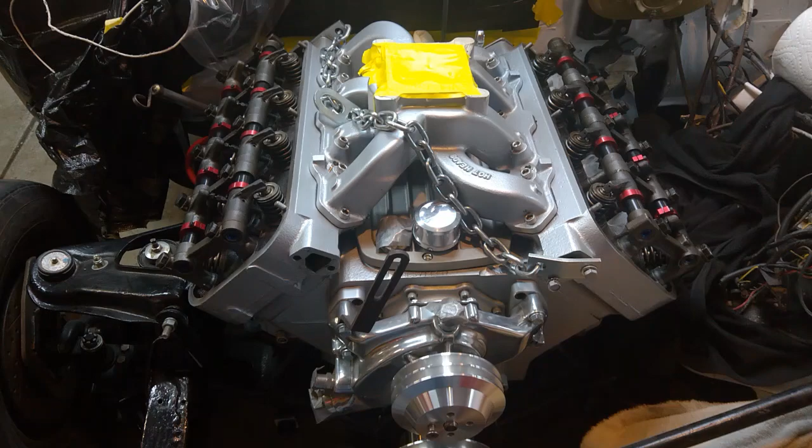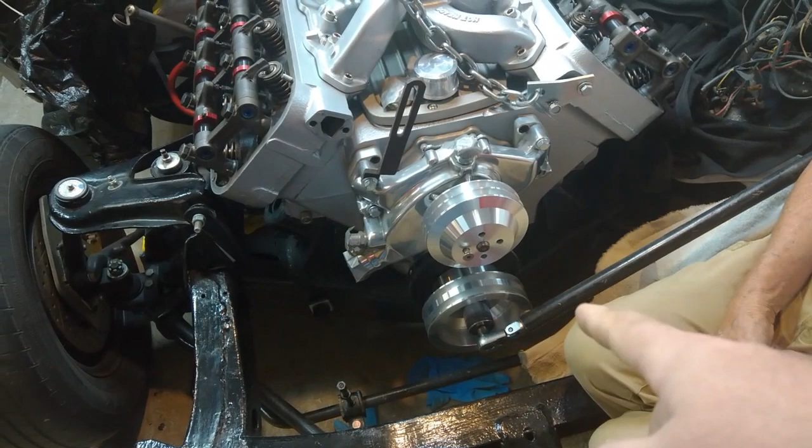Okay, so I'm priming a 392 cubic inch early Hemi. I have absolute top dead center marked on the crank pulley, and I'm attempting to find the rotation on the 2 and 4 cam bearings to be able to push oil through the rocker shafts. So as you can see, this one's just started to come out now.

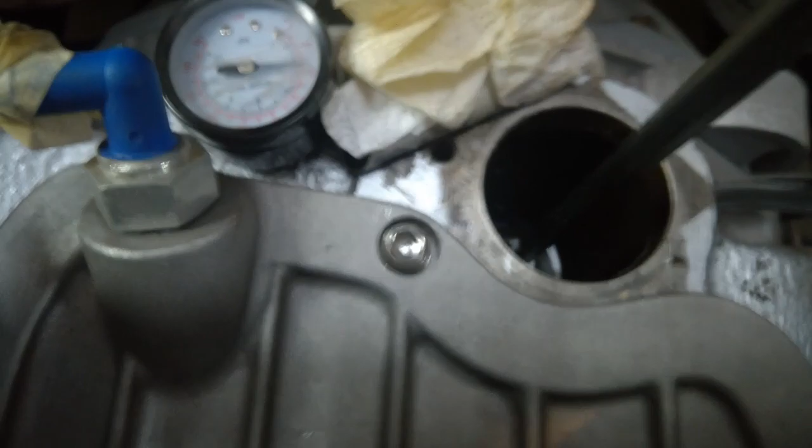This is the drill I'm using, and of course I have it down here on the oil pump to do the priming. So basically you put this in here, turn the shaft, and you'll see the oil come up. The way I found this one was, you'll watch it hit 65, 70, get a nice steady stream. I turn the drill on speed 1, and then turn the crank slowly.

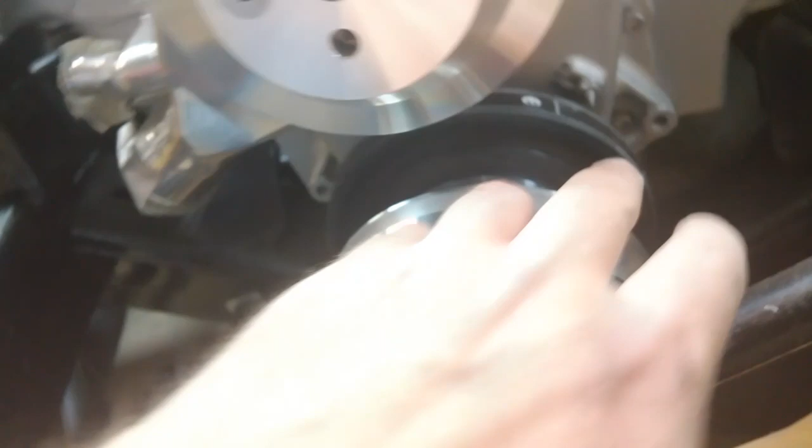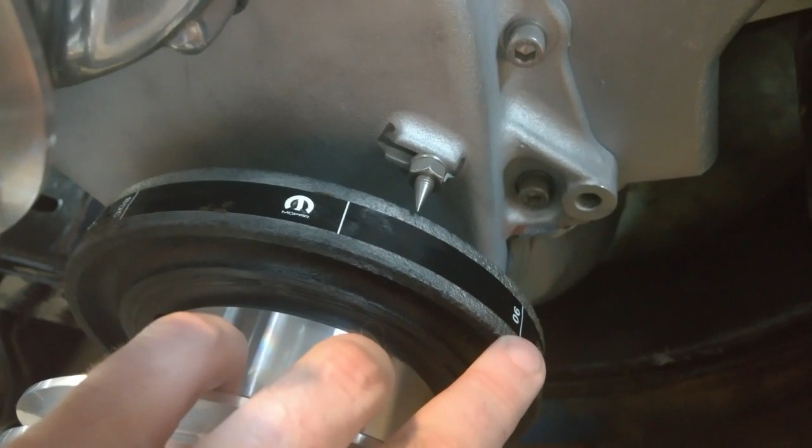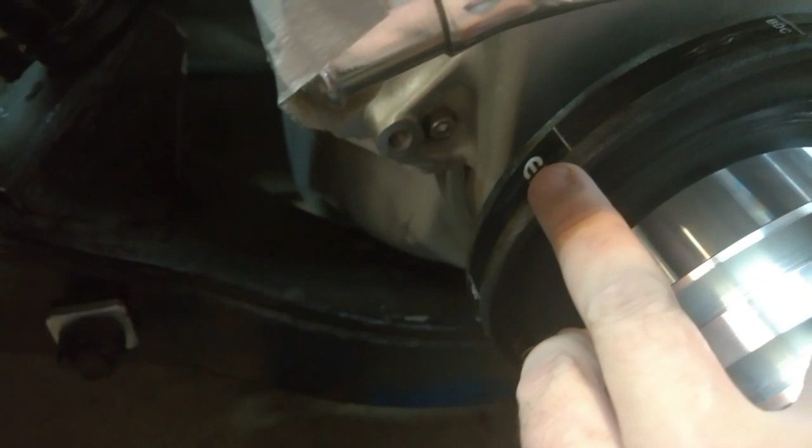I haven't got the passenger side yet, but the point that it hit, this is 90 degrees from top dead center. This would be 120, and bottom dead center is right here. So somewhere between, it looks to be, what would that be, 110? 110 degrees off of top dead center. And I bet the next one is probably going to come over here off of bottom dead center.

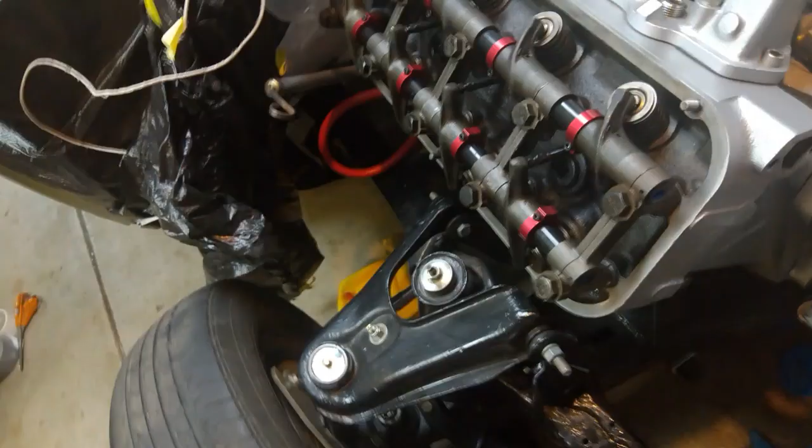So yeah, actually you can tell, if you turn, you'll see the number 8 cylinder is up pretty close, and then the number 5 cylinder is up. I believe the number 5 cylinder is the highest. I don't know if it's top dead center, but you'll see that the number 5 cylinder is up pretty high. You can't see it there, but it is. Anyways, that's the basic idea. I'll see how the next round goes.

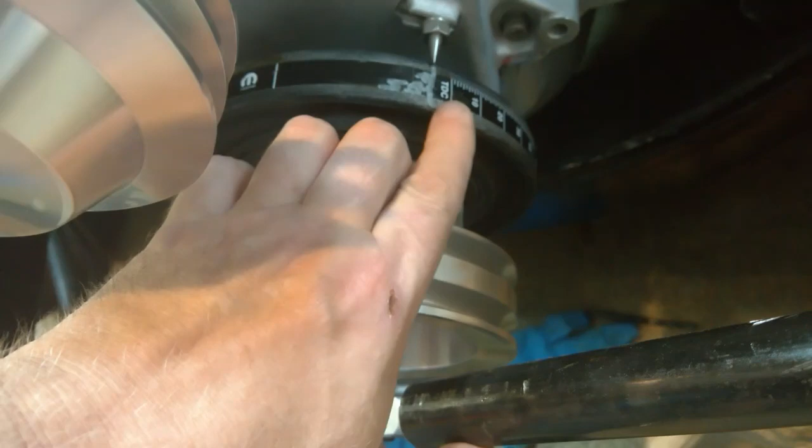Okay, so the second point, which is the passenger side head, the timing mark will be about 5 degrees past top dead center. It looks like this is exact top dead center. Sorry, it's fuzzy. I think the factory setting is like 7 degrees off, but this is exact top dead center. Now maybe my mark is off. Maybe this is actually perfect top dead center, but anyways, you can see the oil coming through now.

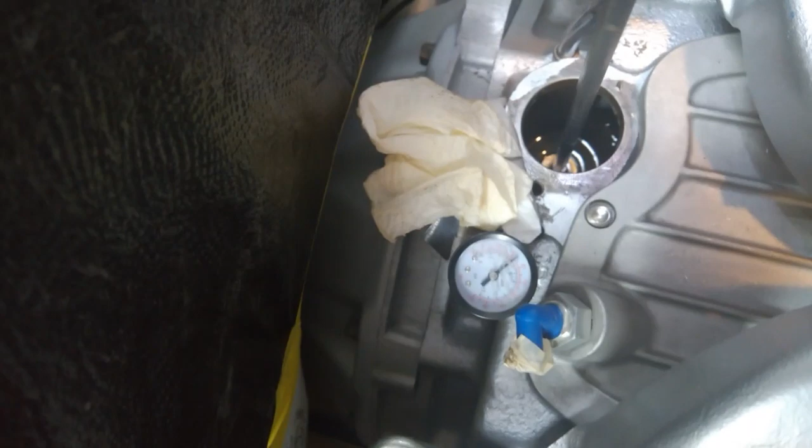I actually marked my crank now, so when I'm about ready to start it, I don't have to take the valve covers off, and I can just fire it up and go. What you do is you put the crank in, you put the drill in here, and you'll turn it up, and you'll see the pressure come up. Like I said, I watch it, and then if you turn it, when you hit them, you'll see them pop. You'll feel the pressure go. That's how you prime a Hemi.

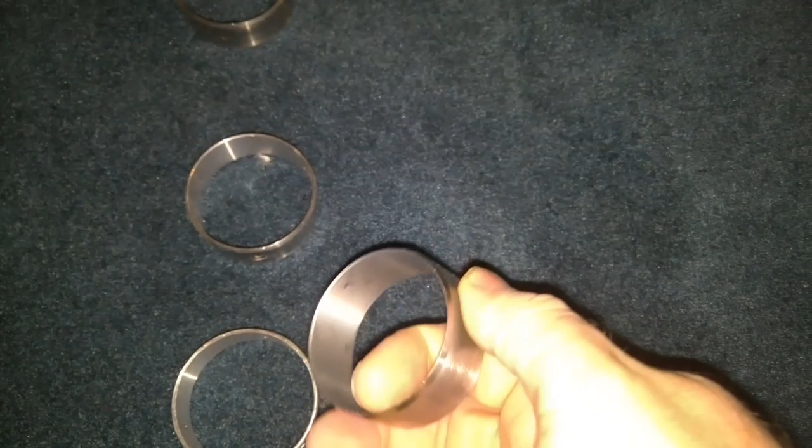Okay, one thing I wanted you to notice is the actual cam bearings. This is an actual front cam bearing. Obviously there's no oiling holes here. But the next 3 cam bearings are the ones that have the oiling holes. That's the main center one that's going to be at the bottom, and then these 2 here are the oil holes that go to the heads. Now these 3 all have them.

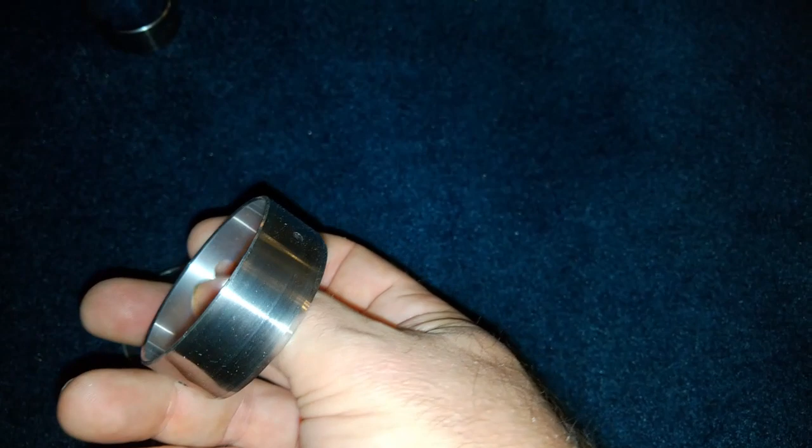I think they just do them out of safety. I think you're supposed to chamfer these; they said something in the manual, you need to chamfer these a little bit. So you'll see all 3 of these, and this is the back one. Obviously there's that large main oiling hole. So these 3, they always want to be safe, and they always include those 2.

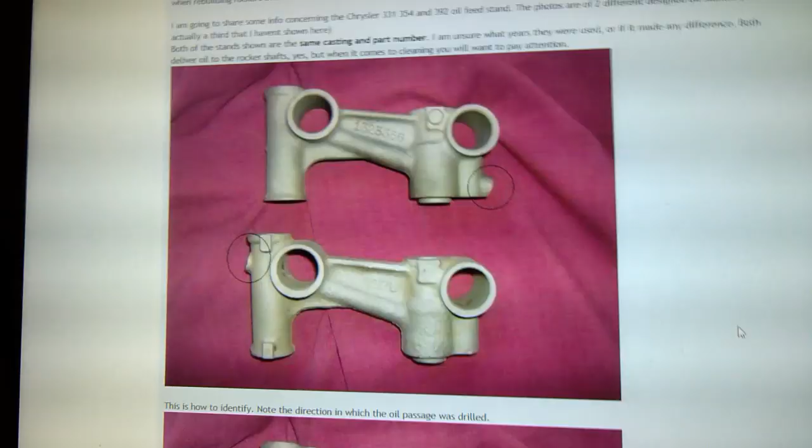You'll see it's a perfect Y, so the oil's gonna come out this way, and as the cam comes around, it'll go out that way, and then it'll go out that way. And I think you'll see that with the timing of where these timing marks are. So that's another hint, some more information about priming issues, or how oil gets around.

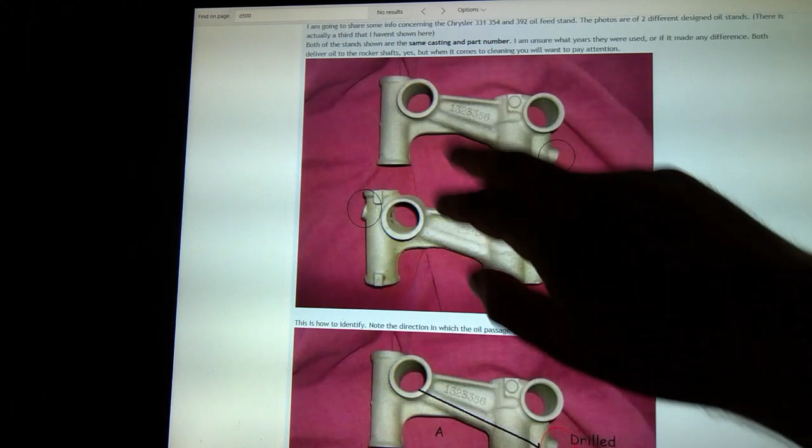This is an example of the two different types of stands you get for the oil. Oil comes up here, goes over to the different rocker shafts. Anyways, there's two different types: the drilled from the bottom and drilled from the top. Drilled from the top are the real easy ones to make sure they're unclogged. Basically, you're looking out for these round rings that get inserted here to locate the rocker stands.

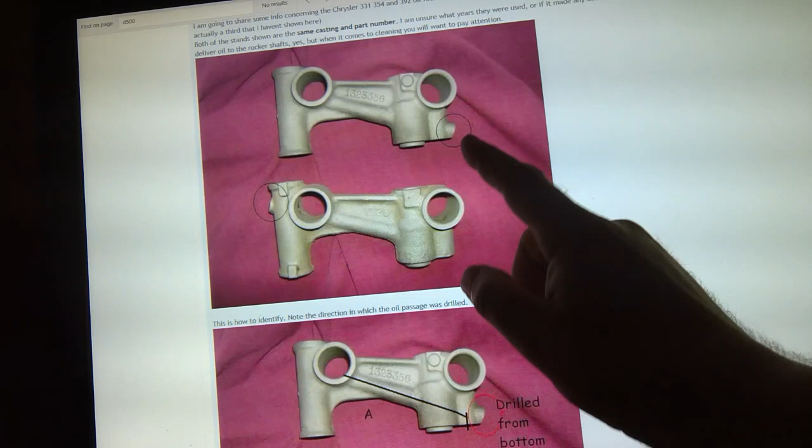So what happens is, when they drill from the bottom, they have to kind of converge. They come up with the hole and then it converges. But sometimes it's a little too close to this ring that they've shoved up here, and it makes a small opening, and the oil won't get through very easily, and they get clogged. So you've got to make sure you do some work around here.

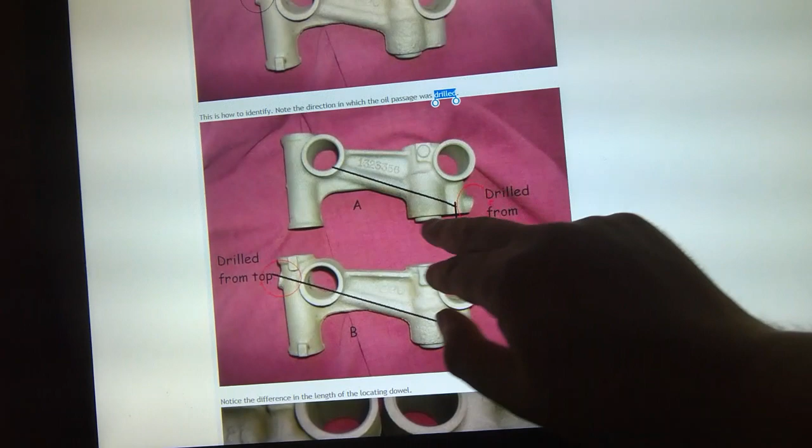This one, which is the drilled from the top, is kind of a clean shot that has to come over that bar. So they say it's easier to clean, and they talk about it here. And then they talk about how the different ones are. Like this one, the oil goes up in and comes through here, and this one goes around. I don't know how that works, but anyways, this is just a hint.

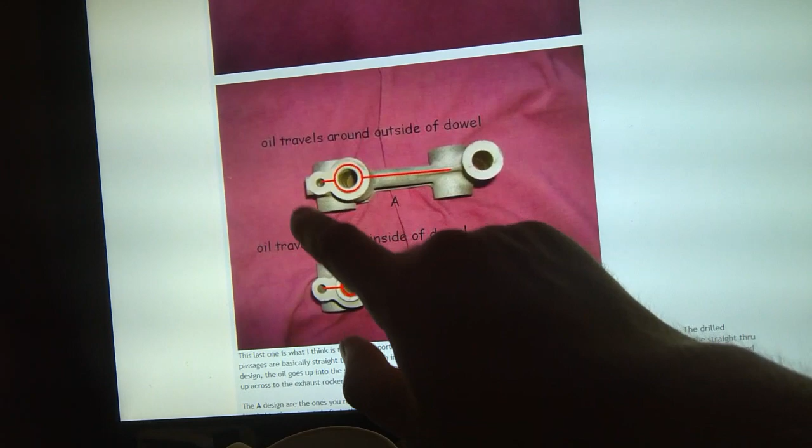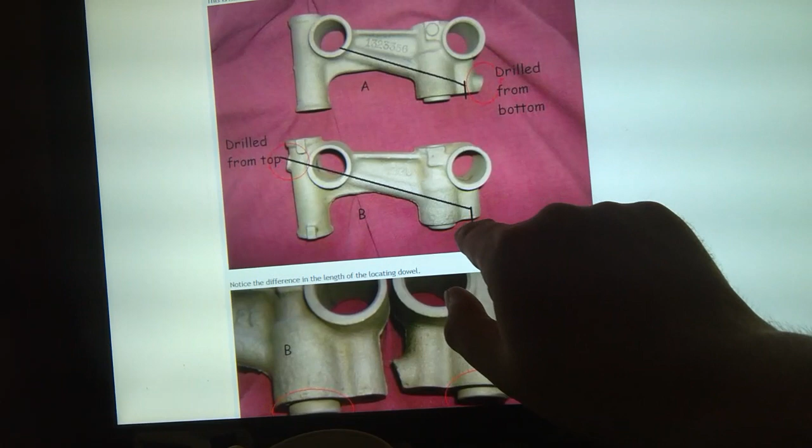When you're cleaning these things, when you're going to prime, if you're having problems with blocking, one thing is to check these stands. Obviously, you want to check them before you put the engine together, but that's just a hint. So this is just another piece of info.

I don't know about the Dodge or the DeSoto Hemis, what their cams look like. I would assume it's the same, but you know what happens when you assume. Obviously, if you're building a Dodge or DeSoto, look at your cam bearings, look at your cam, and you can compare to what I'm going to present. You should be able to figure out if it's going to work for you or not to prime your engine. So that's it.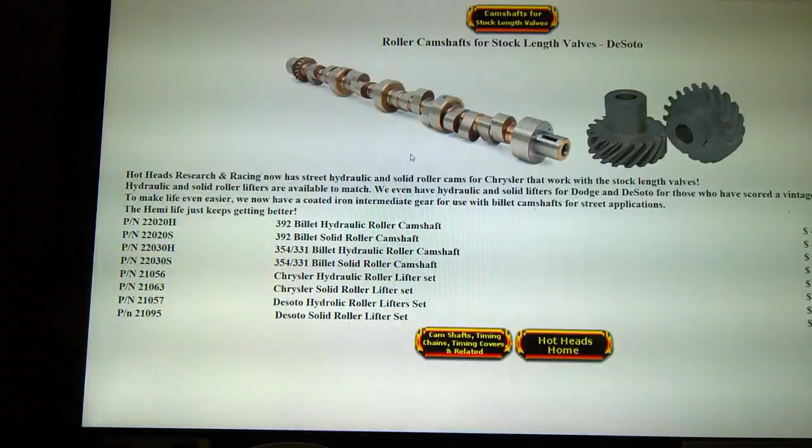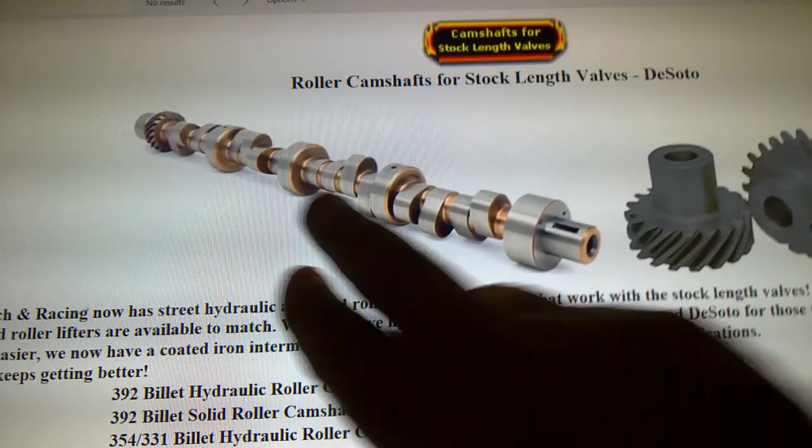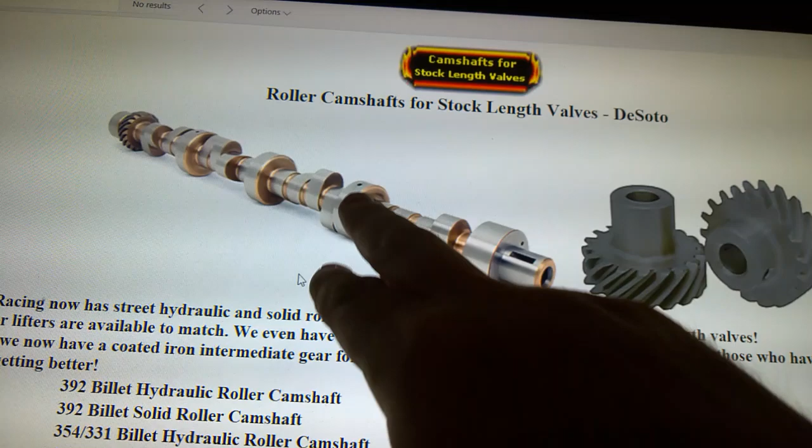Okay, one other final note. Looking at Hot Heads Hemis, they have a cam, and it kind of confirms what I thought. Actually, this is the keyway, and I'm not sure if that's top center, but it looks like from the keyway, these oiling holes are slightly off. I don't know if that actually matters. It doesn't actually. It matters where the holes in the bearings are. So what happens is it hits the one bearing, and then it hits the other one. So it comes around.

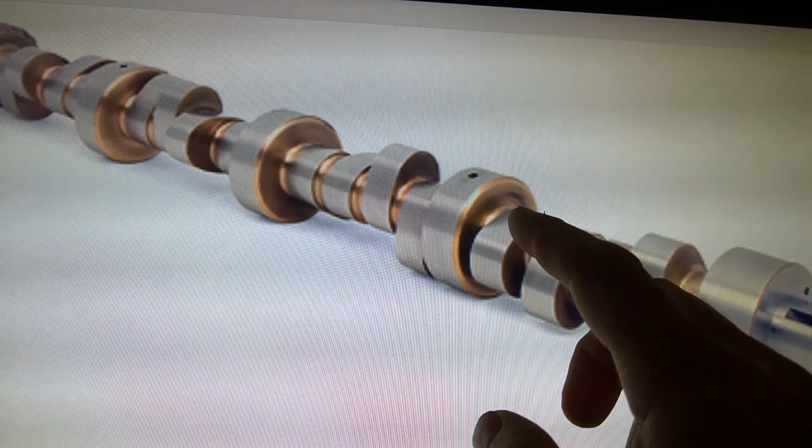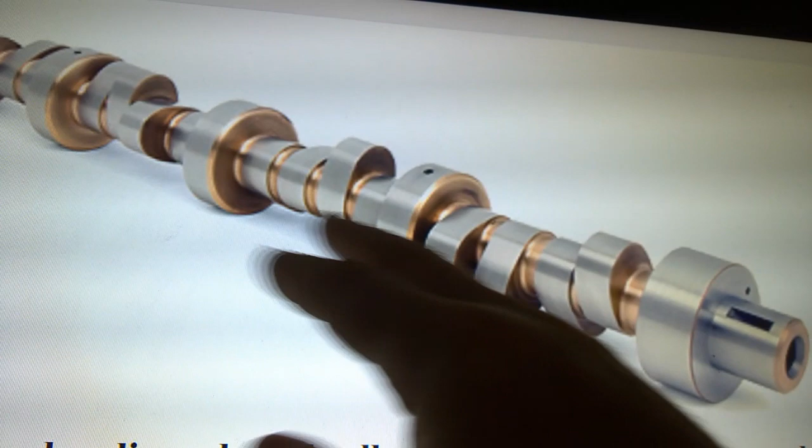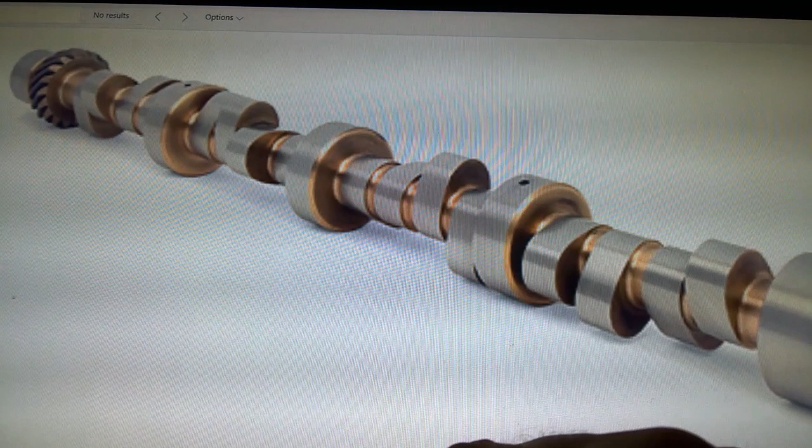It's going to shoot the back bank first, and then the front bank, then back bank, front bank. So every time it goes through, it squirts a little bit into the passenger head, and then a little bit in the driver's head. So it's constantly kind of a dribble. It's pretty funny. I'm curious how they determined it. Well, I guess with RPMs, it's going to increase.

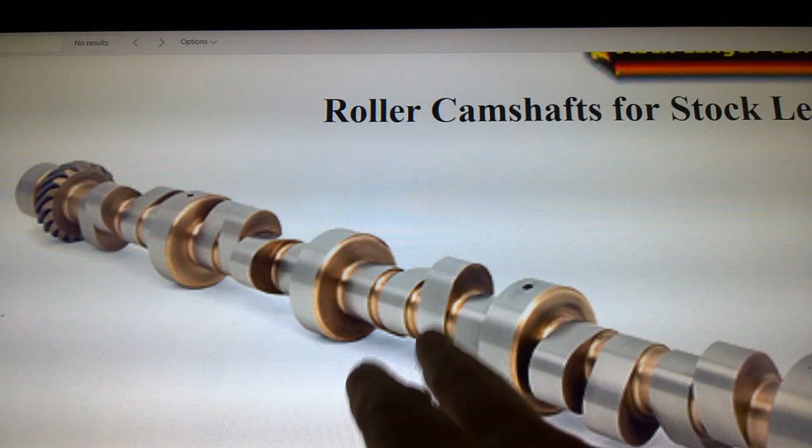Hot Heads Hemis has a picture of a Hemi cam. It says DeSoto, but like I said, if you're putting your engine together and you have your cam out, you might want to take a look to see if this is the case.

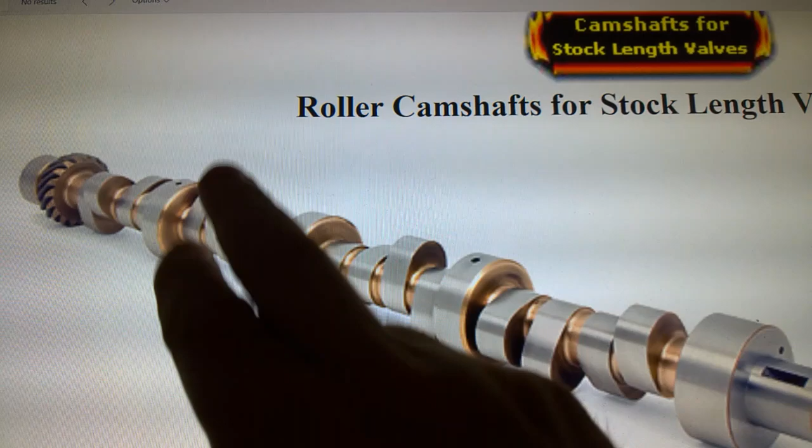I believe this is always going to be the case, they're always going to be aligned. I think I've always seen Hemi cams have those same two oiling holes lined up. So just another bit of info.